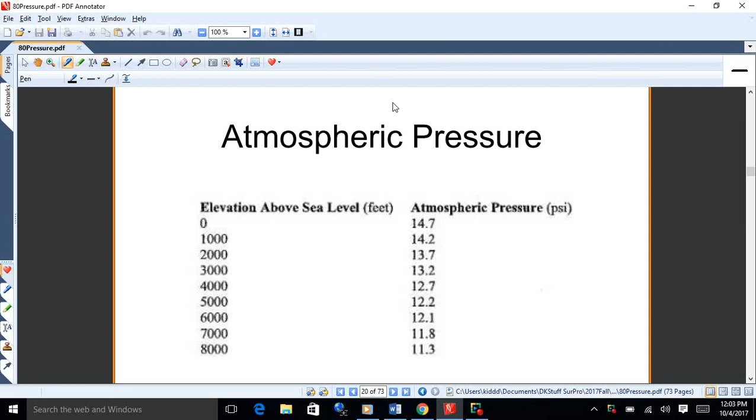So we doing okay with this stuff? So we have just that direct relationship between height and pressure. Don't make it any more complicated than that.

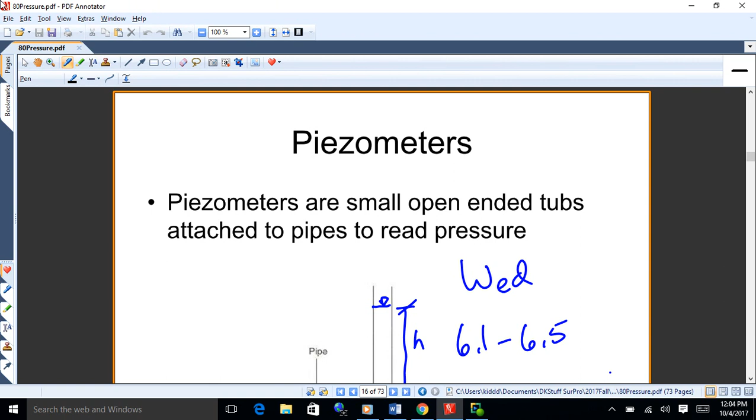Okay, so 1 foot is 0.433 psi. And then you can use that relationship to measure pressure in pipes using what they call a piezometer. I remember back when I was in school, they were doing some hydraulic testing, and they had these things filled with red oil, is what I remember, so they could read them.

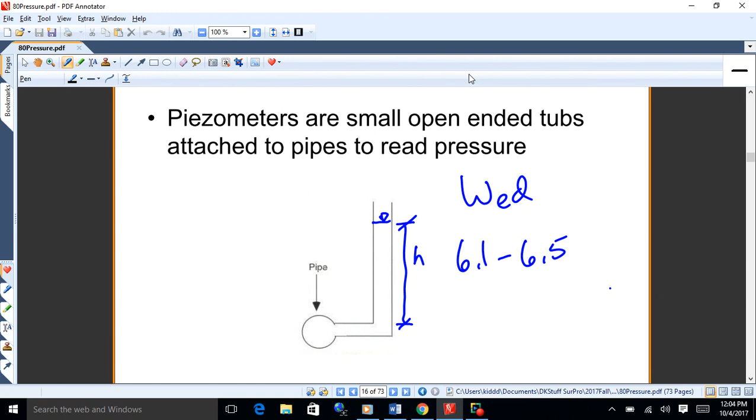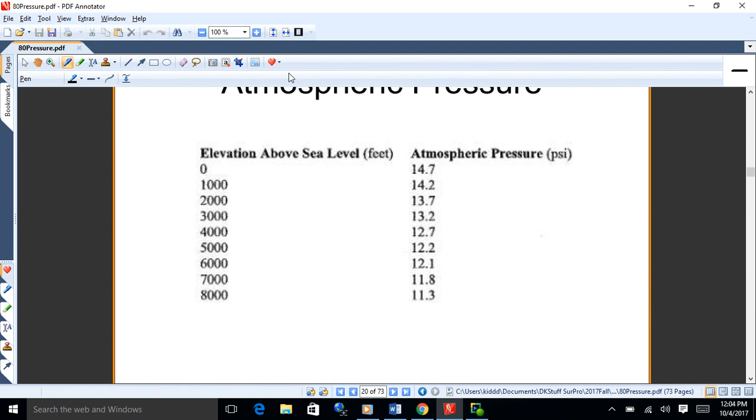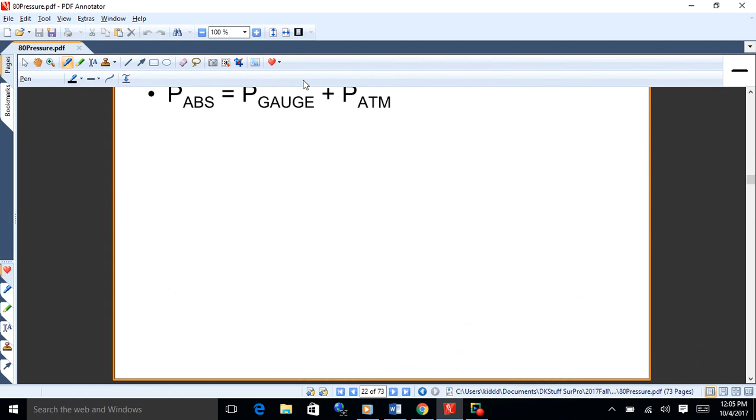All right, and then we started to look at atmospheric pressure a bit. And what we figured out here is that if you put a closed tube of water and turn it upside down into a vat of water or a tank of water, what's going to happen is the water in that tube will rise 34 feet, okay?

So we figured that out, and that has to do, if the tube were a square inch in area, that atmospheric pressure is 14.7 psi. You'll get a vacuum at the top of the tube, so there's no push back at the top. So the atmospheric pressure pushes on the water, and all those water molecules push on each other, so you end up with a push going up the tube that holds up 14.7 pounds of water. And if you work that out for a 1 inch square tube, that comes out to be 34 feet.

Okay. So we okay with that?

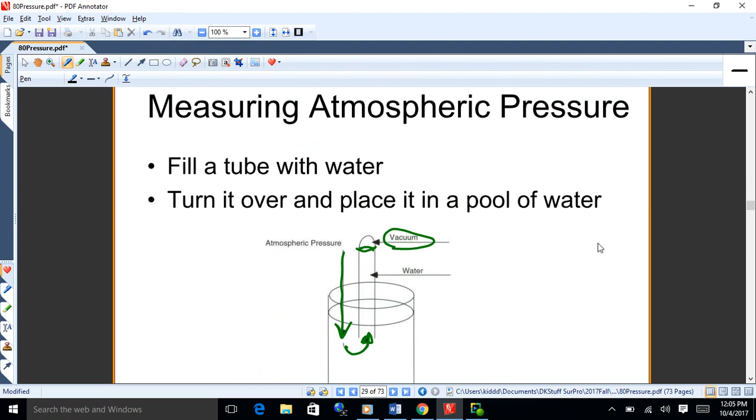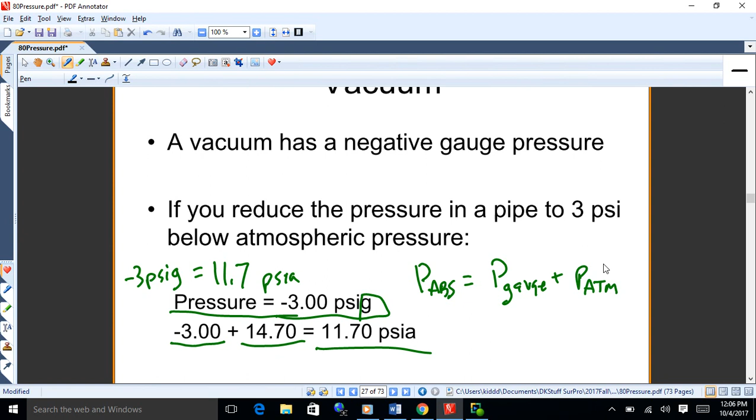All right, and then we also looked at absolute pressure and gauge pressure. Gauge pressure is the everyday average pressure that we deal with. Absolute takes the gauge and adds atmospheric to it. Okay, so those are some of the things that we worked out.

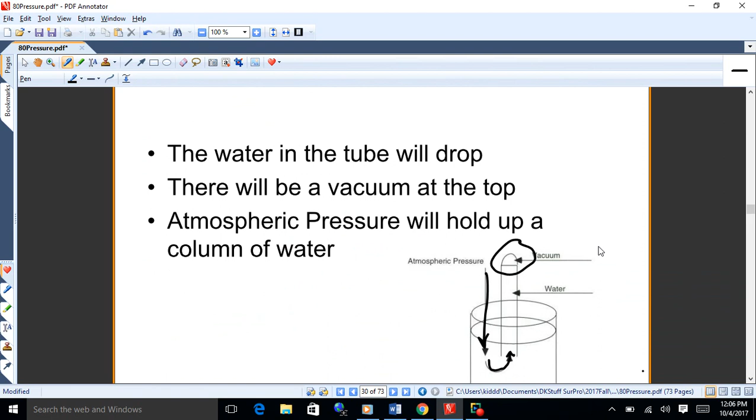All right, so what we've got now is a few ways of looking at things. Atmospheric pressure is 34 feet of water. It's also 14.7 psi, A for absolute.

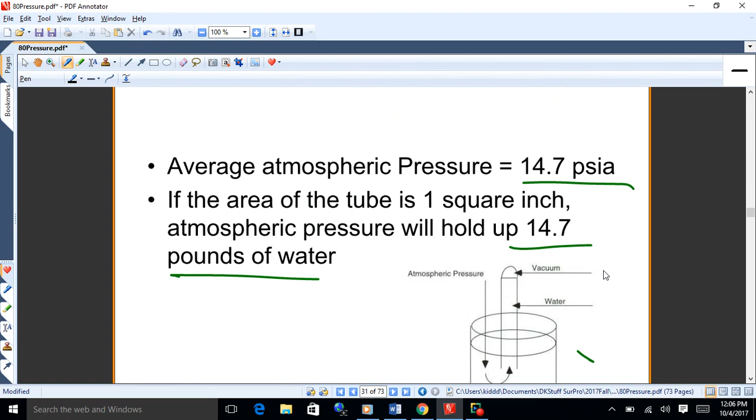Now, in reality, there wouldn't be a perfect vacuum at the top of that tube. There'd be a little bit of vapor pressure. We'll get into this more when we look at pumping, so we won't discuss it too much more, but in truth, some of those water molecules in the tube would evaporate, and they'd start creating a little bit of pressure that would push that column down a little bit. Not too much, but a little bit. But we'll get into that later. Okay.

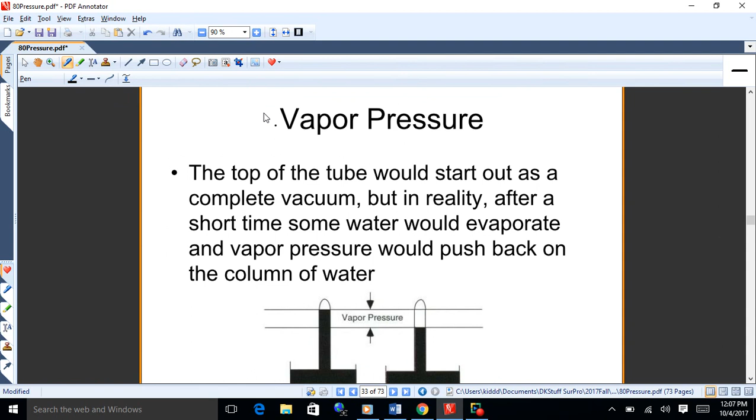All right, now what we've got here is a few relationships. So what we've got is that 14.7 psi is equal to 34 feet of water. Okay, they're equal. They express the same thing, the same pressure.

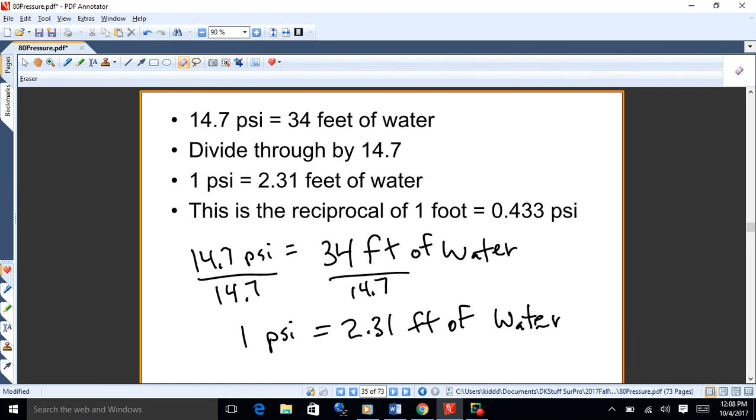Now what you can do is divide both sides by 14.7, if you like. And what you'll get is 1 psi equals 2.31 feet of water. This is on your formula sheet also, I think, and that's another relationship you can use to do conversions with. So we've gone both ways with that.

We also have that 0.433 psi is equal to 1 foot of water. We can go either way with it. Those are just reciprocals of each other, going in different directions. Okay, so those are equivalent things.

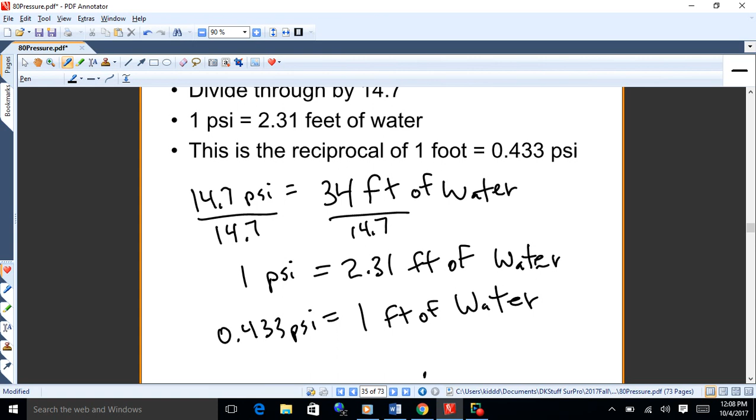And I think you've got both conversions on your formula sheet, if I remember right. We do. You do? Okay, great. So that's there for you if you need it.

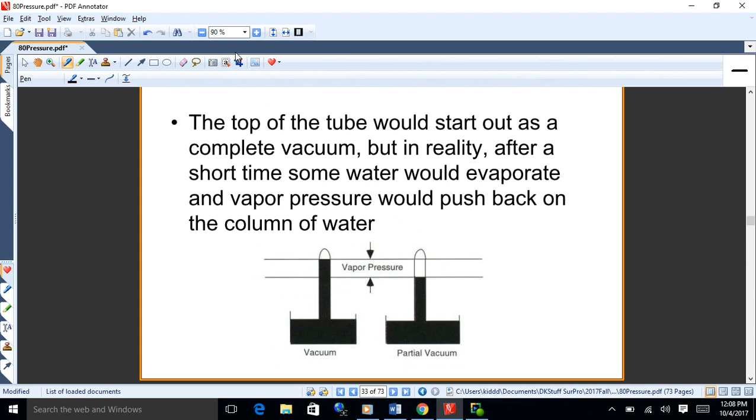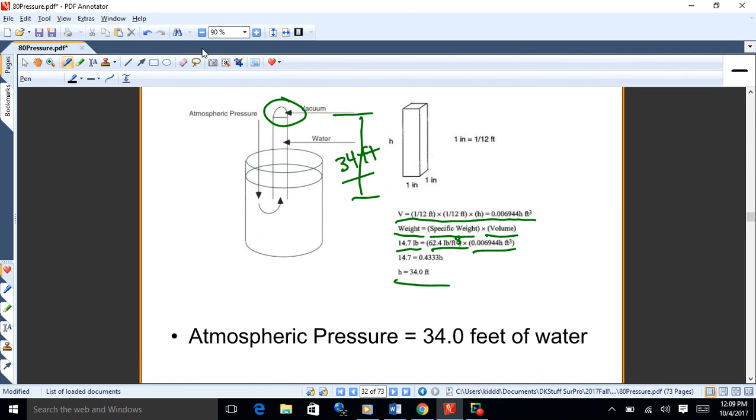All right, now getting back to this idea of a barometer, you could make a barometer out of water and the thing would be 34 feet high. They actually used to have barometers filled with fluid and they measured the height of them to determine atmospheric pressure. But a 34-foot high barometer is obviously pretty impractical.

So what was commonly used was mercury. Mercury is a heck of a lot heavier than water. It's 13.6 times as heavy as water is. So if you take that 34-foot water barometer and divide it by 13.6, you get 2.5 feet, which is 30 inches. So atmospheric pressure can also be described in inches of mercury.

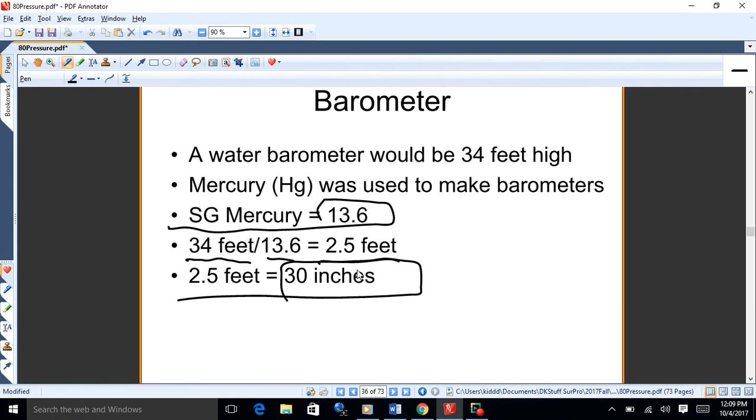Average atmospheric pressure at sea level is 30 inches of mercury. They actually used to use gauges like this and measure them. And if you ever listen to the weather report, they'll report the barometric pressure, they call it. That's from a barometer, and they'll tell you how many inches of mercury it is. That's the common way they use to report weather. Okay.

That's where that number 30.29 comes from. As it goes down, they watch the barometer go up or down depending on what sort of weather system's moving in. If the barometer drops, you probably got some storms coming in, and the lower it goes, the more likely you are to have storms. High pressure systems are more clear and sunny and bright. That number really comes from an actual barometer. Now those things are obsolete, but they still use the term.

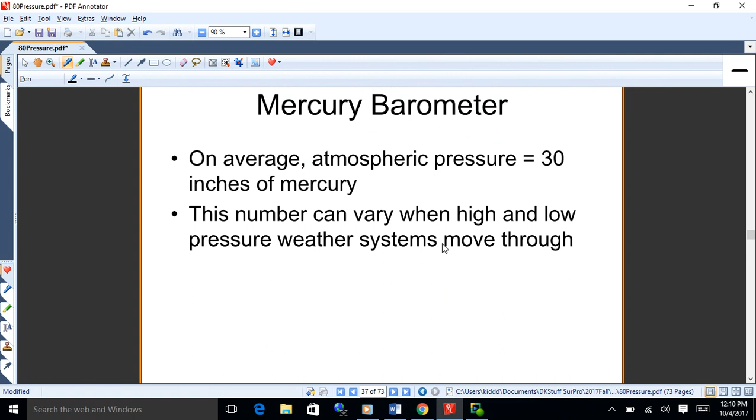It gets a little complicated because there's 3 ways to measure atmospheric pressure. Average atmospheric pressure is 14.7 psia, 34 feet of water, and 30 inches of mercury. You could use any of these, and they're all used in different situations. You've got that on the formula sheet, in the left-hand side in the middle, and I've got a chart there that helps keep these things straight.

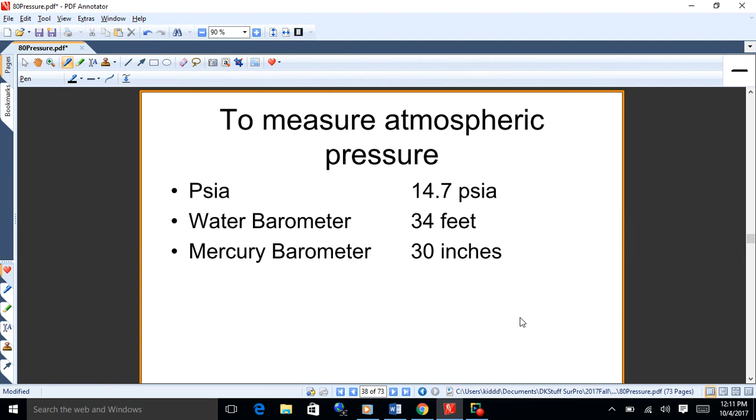Often what we use all this for in our line of work is measuring a vacuum. A vacuum is a pressure less than atmospheric. If you measure from absolute pressure equals 0, like a perfect vacuum in outer space, you can measure a vacuum in psia absolute pressure, a water barometer, or a mercury barometer. Those are 3 different ways you can measure a vacuum, assuming the perfect vacuum - absolutely no pressure at all - is 0, and you're measuring up from there.

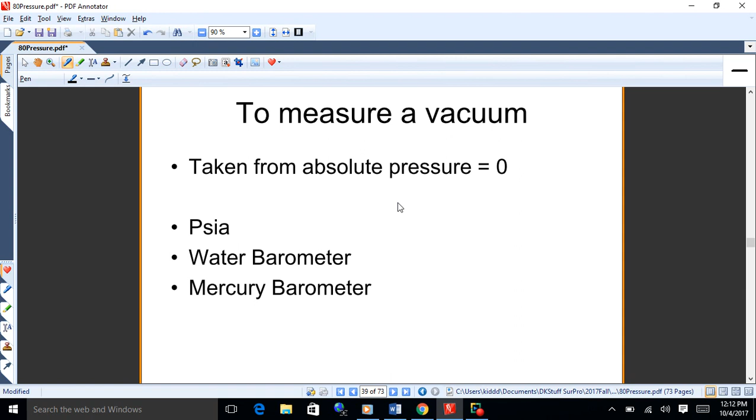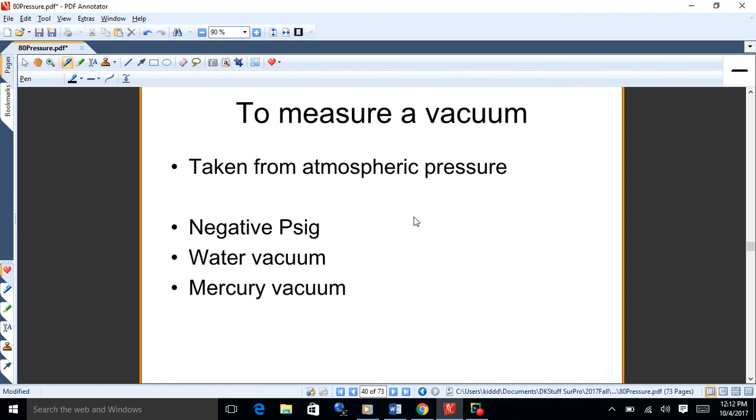You can also measure a vacuum from atmospheric pressure, calling that 0. If you're doing that, you would measure the vacuum in negative psig gauge pressure, a water vacuum, or a mercury vacuum. So you can measure a vacuum, as it turns out, in 6 ways. There's 2 different 0 points: either 0 is a perfect vacuum, or 0 is atmospheric pressure.

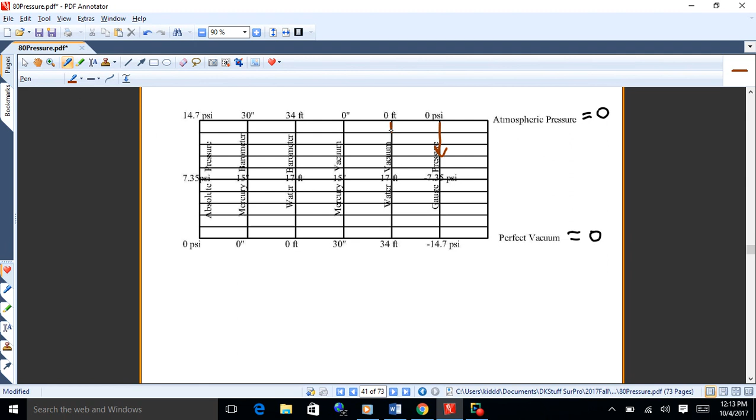So you've got 2 different 0 points. For gauge pressure, 0 is atmospheric pressure, and what you do to measure a vacuum is measure down. So if you have gauge pressure, you'd measure down like that. If you have a water vacuum, you'd measure like that. And if you have a mercury vacuum, you'd measure like that - they're all measured down. The word vacuum on a measurement means it's a negative number.

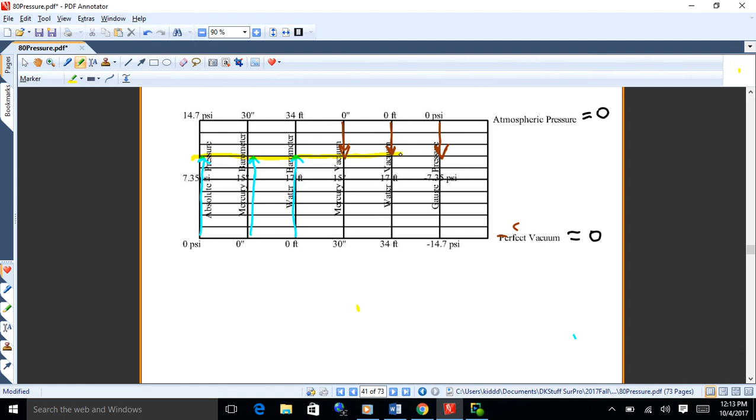Measuring down. Now the other way to measure a vacuum is to start at a perfect vacuum, being 0. In that case, your measurements go up. You always count your measurements from 0 to whatever it is you're going to - that's how I think about that chart. So if the measurement is right there on the yellow highlighted line, you'd measure it as shown. It's always from 0 to the measurement.

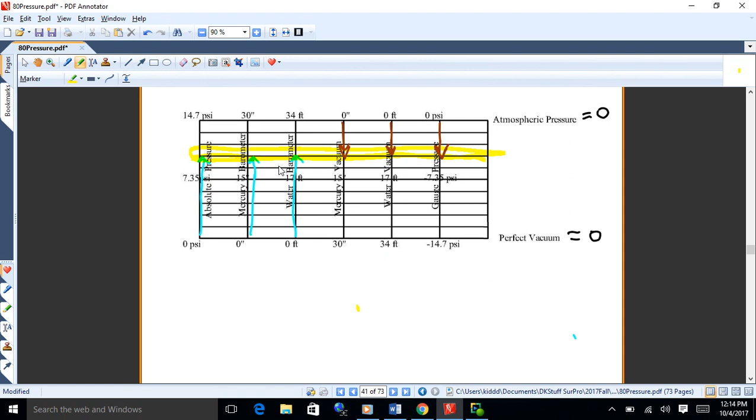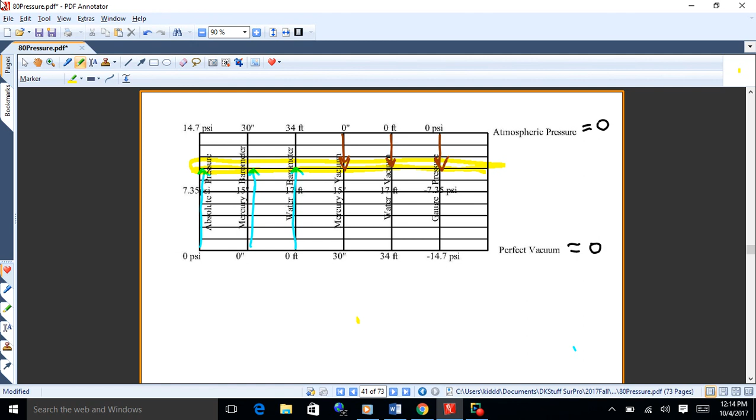There's three ways to measure: water, mercury, and psi. You can either measure them down from atmospheric or up from a perfect vacuum, either way. We just want to be able to convert these from one unit to the other, depending on what we've got, because we seem to use all of these in different situations. But the one thing to remember is you always start at 0 and measure to the line - either up in the case of absolute vacuum being 0, or down in the case of atmospheric pressure being 0. So you start at 0 and measure to your line. This is one way to do these conversions - to me it makes it kind of handy.

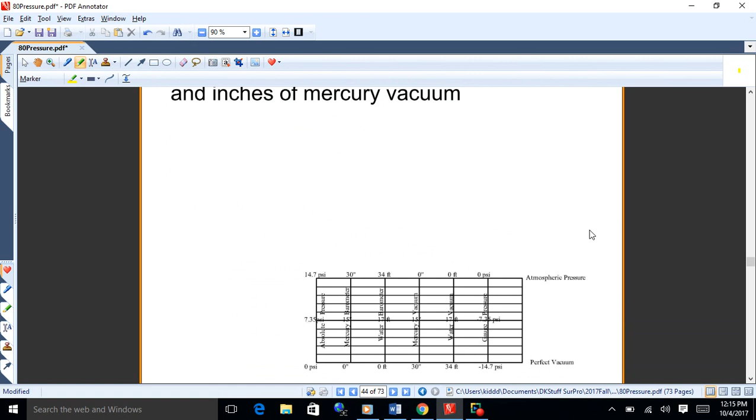Let's do an example here. Let's say we got 24 feet of water barometer, and we want to convert that to psia and inches of mercury vacuum. So what I would do is go to this little chart and find where 24 feet of water barometer is at.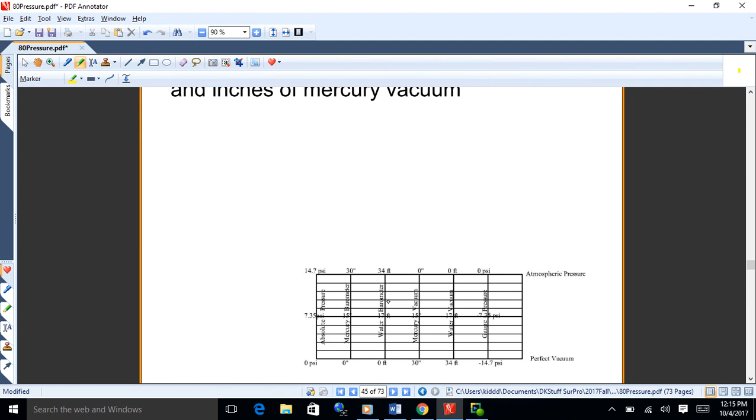Where that's at is on the water barometer column there, the third one over from the left. Halfway for that is 17, so my thinking is 24 ought to be about there. So here's where 24 feet of water barometer is on that chart - that's its location.

Now I'm going to have to convert to a lot of different units. So what I do - and there's many ways to do this, this is just a systematic way - is figure out what percentage of the way on that scale you are. What's the percentage of the total that you've got? So I'm going to take 24 feet of water, is what I'm going to do.

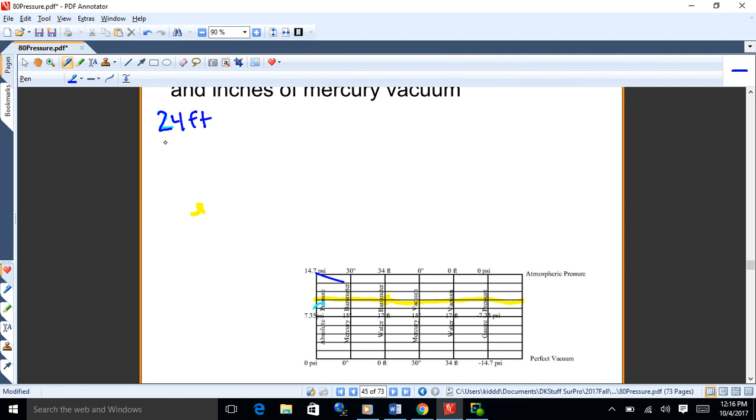And I know the total is 34. So if I divide those out, I've got 70.6, or 0.706 as a decimal. So the idea here is underneath the yellow line, I've got 70.6%, and above it, I've got the remaining percent, which would be 29.4%.

So I'm 70.6% of the way up the scale, that's the idea. How do you know it's 34? 34 is the total. And you know, the total varies depending on which unit system you're in.

So you all okay with that? Okay.

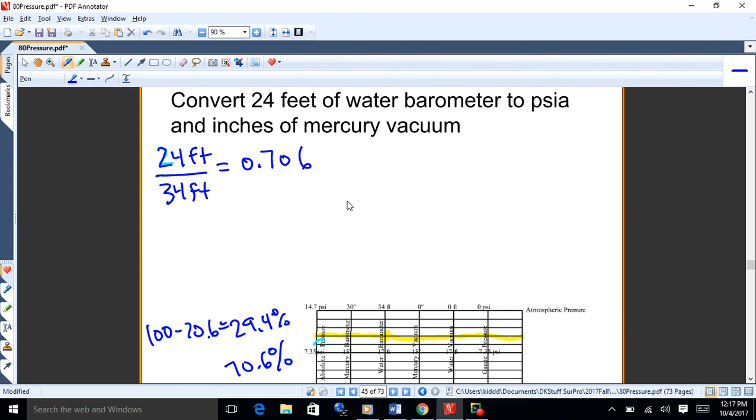So what I want to know now is what other units do I want to convert into? What I want to convert into is psia, and inches of mercury vacuum. All right, so psia, let's see where that is, okay?

So with the water barometer, I came up like that from the bottom, because you always start at 0 and measure to what you want to find.

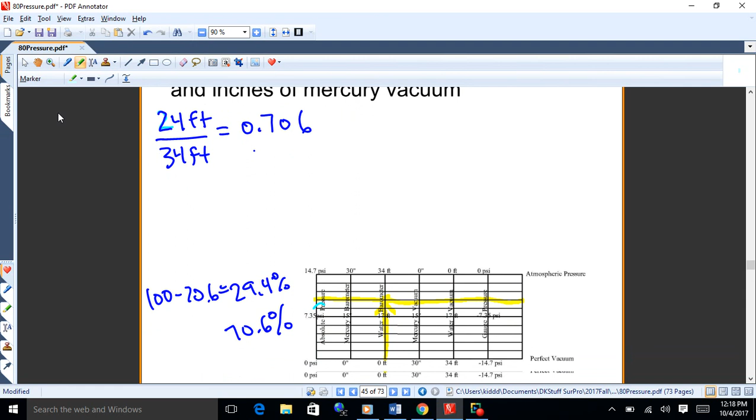Okay, psia, where are they at? They're right here. So I want to measure from the bottom up for psia, like so.

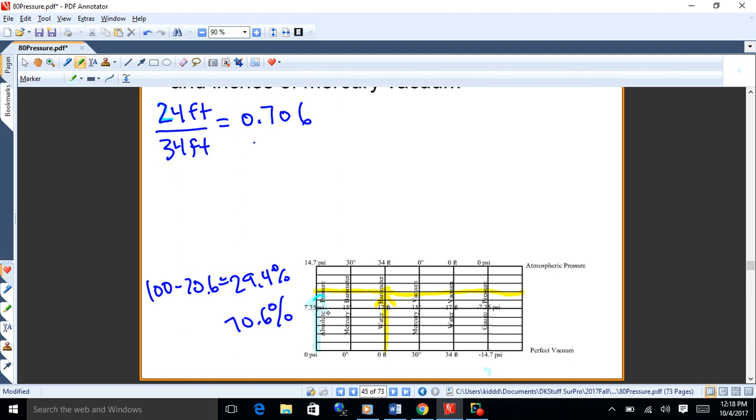And then inches of mercury vacuum, what I want to do is find that, okay? So inches of mercury vacuum are right here, and from there I'm going to start at the top and measure down, okay?

So you always start at 0 and measure to your line. That's the general rule on this stuff.

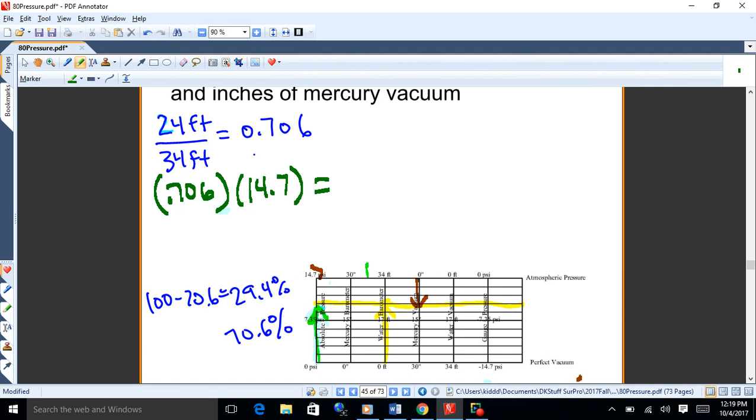So for the psia here, what I'm going to do is say, okay, I've got 70.6% of the way to go, so that's 0.706. And the total is 14.7. So if I take 70.6% of 14.7, I get 10.4. So that's the psia I've got.

And then if I want to find the inches of mercury vacuum, what I've got on the top of the line where the red arrow is, right here, is 29.4%, so that's 0.294. And mercury vacuum is 30 inches. So when I multiply that out, what I get is 8.82 inches. Hg is the chemical symbol for mercury.

So by using this chart, I can figure out which side of the horizontal line I am for my particular measurement. I can find the percentage on either side, and apply that to the total scale I'm dealing with. Always start at 0 and measure to the line. Everybody okay with that? All right.

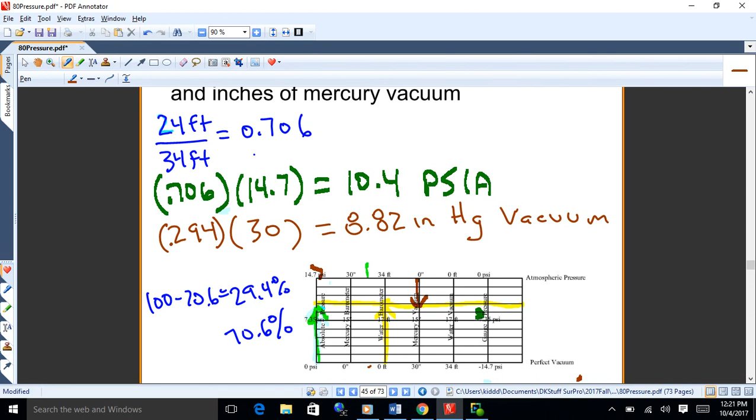Now there's other ways to do this if you like. This is just a graphical way that you can see it. I put the chart there on your formula sheet, so you can use that on homework or exams or whatever, okay? It's right there. There's other ways to do it though, if you prefer. Whatever works for you is fine.

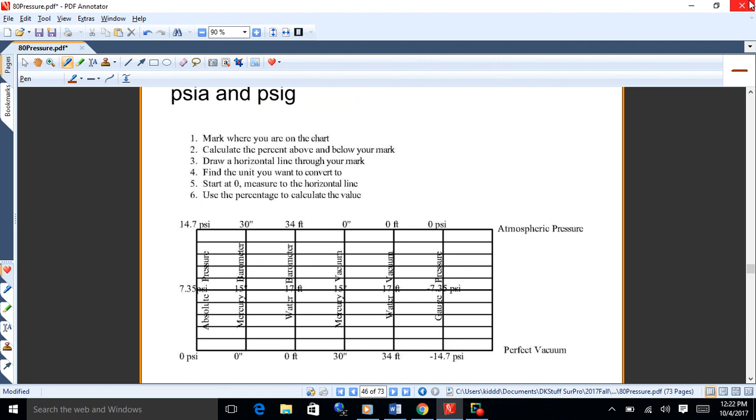All right, you two can do this, so why don't we have a look at the next one there.

Convert 20 inches of mercury vacuum to psia and psig. So why don't you work through that?

I don't know if it is exactly right there. I'm just drawing the line about the spot. Here's 15, here's 30, so I know somewhere. It doesn't matter that I put it in the spot. But it's going to matter for this. Well, it matters that that's really what I want, those numbers.

So if I just draw the line anywhere here between 15 and 30, because I'm going to do the calculations to calculate, it doesn't have to be drawn exactly. And this is the choice. So mercury, just pay attention to what side the zeros are on.

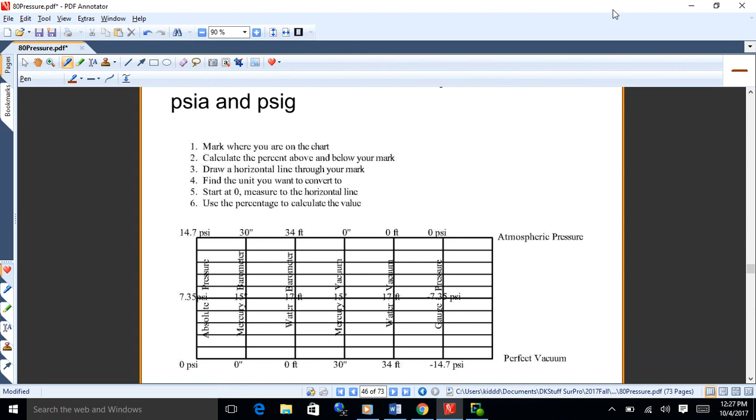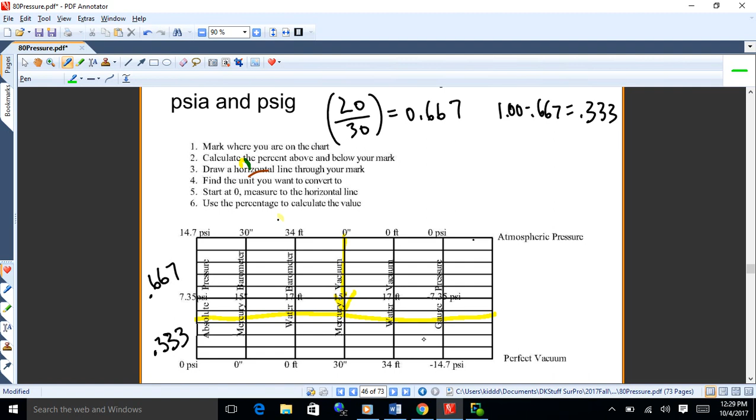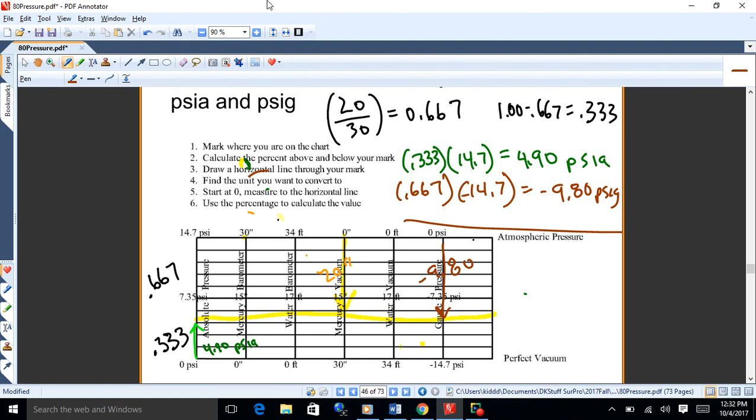Okay. Good with that? Okay. Okay.

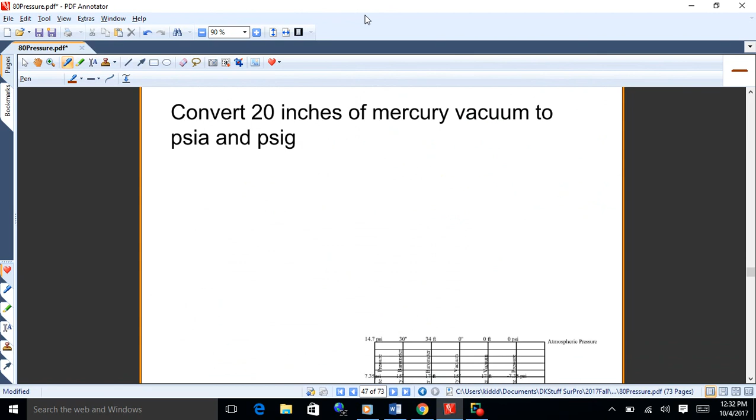So that's another type of pressure problem there, okay?

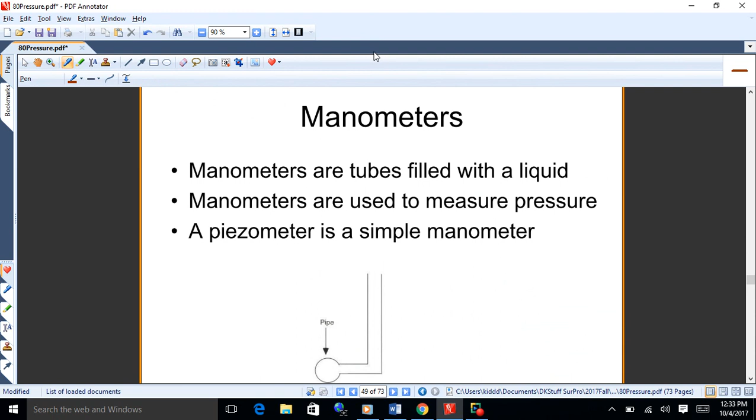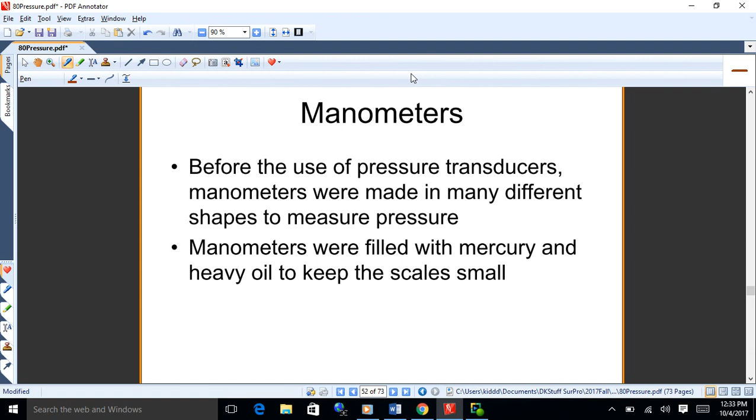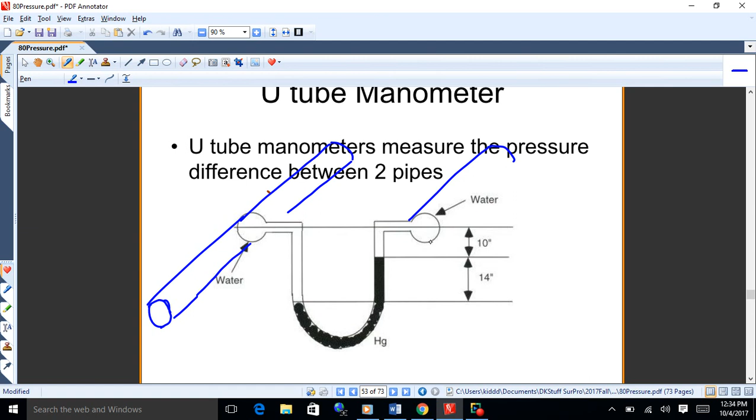So the pipes are coming in and out of the page kind of like that. Okay. And then the manometer tells the pressure difference between the two pipes.

That's the idea. And the side of the pipe that has the lower water level has more pressure? Yeah, because it's pushing the heavy fluid towards the other pipe. That's the idea. Okay. Any y'all working in plants still using these anywhere?

Anybody seen one of these? Yeah, okay. They're old technology. I mean, you know, the new stuff's all digital. You know, okay.

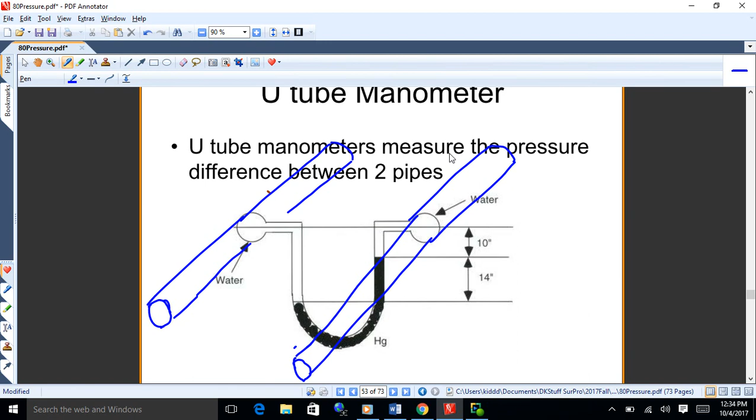So what you can do, you can use this to tell the pressure difference between two pipes. Now, what you do is you look at how much mercury is being held up, but you also want to look at how much water is being held up too. So you want to look at both of those things, and that's how you determine the pressure difference.

So here's how I would approach this thing. Now, in your book, you've got 36 and 24, a little bit different than the sketch I've got, right? So you've got 36, or 24 on the left for this one. And 36 is the total, right? Okay.

All right, so the way I look at these is I go, okay, what's different about what the two pipes are doing? So what's happening here is the pipe on the left is pushing water towards the pipe on the right. Okay? Or pushing the mercury, I should say. All right, so if I look here and look there, the difference is between the two red lines. Above the top red line and below the bottom one, everything's the same. So the difference is here.

So those are A and E, are the names of the pipe. So to keep this simple, what I would do here, I would just look at what A is doing towards E. And what A is doing towards E is it's holding up 24 inches of mercury.

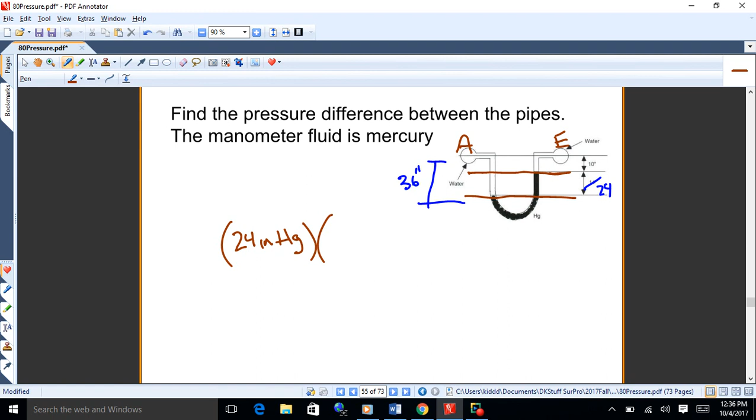And then what would we do with that? We would go, and I guess the first thing we better do here is get this into feet, okay? Hg is the chemical symbol for mercury. That's why I'm labeling that Hg. All right. So I'm going to go 2 feet of mercury.

And then I know that 0.433 psi per foot is my conversion for water. And I know that mercury is 13.6 times as heavy as water. There's other ways you could do that conversion, but that's how I'm doing it, because I know that mercury has a specific gravity of 13.6.

So what that's going to give me is the psi of mercury that would push up, if it were pushed up 2 feet, that would be the equivalent of 11.78 psi.

Now I do have to account for the other side though, because there's 2 feet of water being held up by E towards A, and I have to account for that. See, A doesn't push that 2 feet of water towards B, it pushes the mercury.

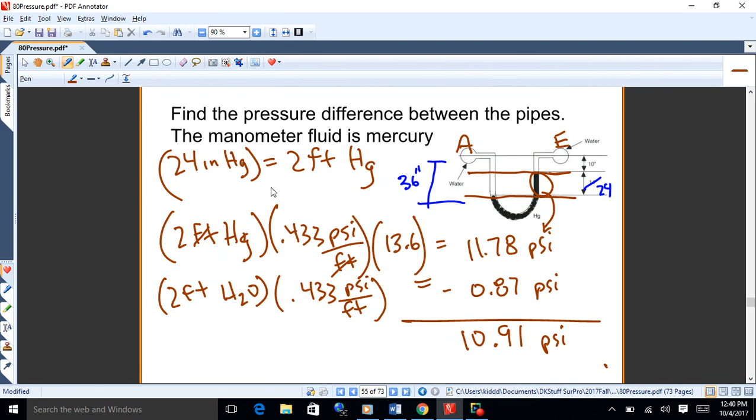So we good with that? Any questions? Okay.

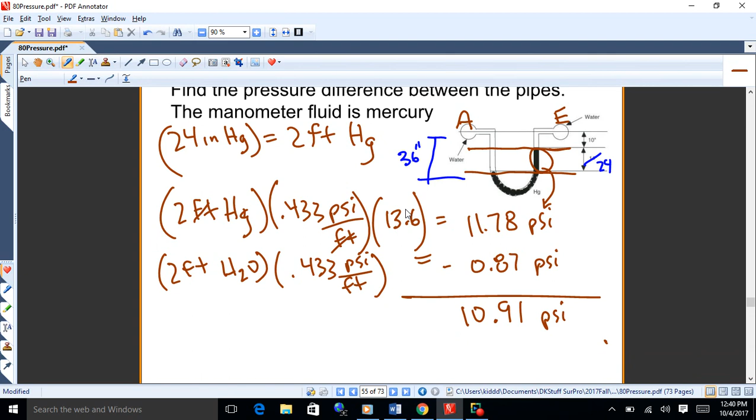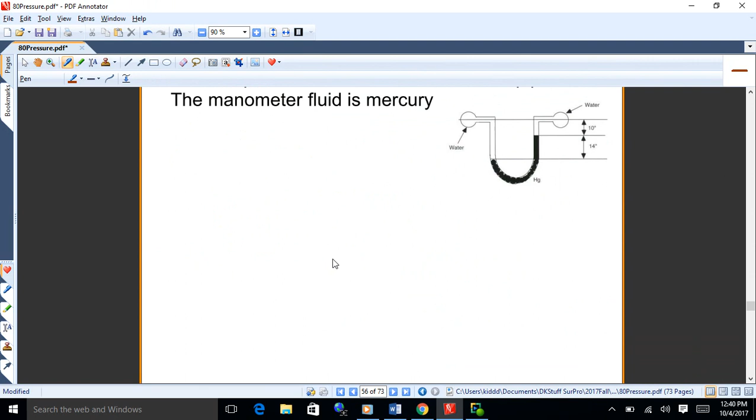All right, so those are the old ways of measuring pressure. There's also something called a Bourdon gauge. And what a Bourdon gauge has is a dial face on it with a range of pressures. It then has a tube made out of some sort of metal that'll flex a little bit.

Copper or brass are fairly common. So if you pressurize this little arc of metal, it'll try and straighten out. Then you run some linkages in there and turn the dial with that. So this tries to straighten out, and the linkages then turn the dial. That's the idea.

All right, so this is an analog gauge, it's not digital. So that's another way to measure pressure. Now, if you're going to use this gauge, what pressures would you trust it for? Or what pressures would maybe not trust it for? Whatever you want to think about it.

Does that thing measure accurately from 0 to 15 psi? Where do you want to use this thing for, though? See, these things are a little tricky. Think about the engineering that goes into doing this. You're taking the flex of a tube and converting it into a pressure. That's not exactly accurate, you're right. That's a little hard to do. I mean, it's a cheaper gauge, but you are sacrificing a bit of accuracy.

Where's the range for which it's most accurate, though? In the middle, okay? I don't know exactly what the percentages are, but I wouldn't want to be using this gauge for low readings. It's not going to be super accurate down there, nor is it going to be super accurate near 15. I'd estimate 3 to 12 or something like that. So when you're using these things, try and stay in the middle of the scale. Consider getting a different gauge if you're not. So generally you want to be using those kind of, in the middle range.

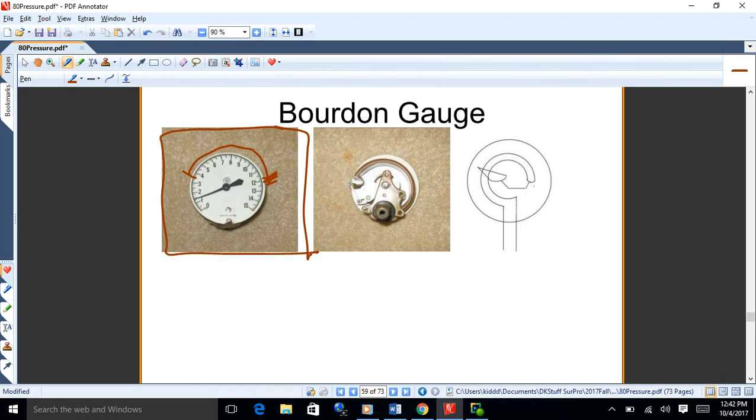All right, have you all in the water program taken that water sources class? Did you go out and look at the wells we got on campus? You can go look at them, talk about them. You talked about it, you didn't look at them. We looked at the sheet that was right when they were put in. Yeah, well log and all that. Okay, but you didn't run any testing on it or any of that.

Okay, well, do you know what a drawdown test is? Okay, so what you want to know with water wells is how deep they are. And that is something you got to be careful about, because if you put too many wells in an aquifer, you start pulling more water out than it's coming back in. The aquifer is going to start dropping and dropping and dropping, and that's trouble.

So what you're going to do, these are called bubbler gauges sometimes because they push little bubbles of air out the bottom of the gauge.

Does that make it easier for the water? No, I don't think it really makes much of a difference. It's not a whole lot of air, but they just push a little bit out, so you get a stream of bubbles coming out of it. And what they measure with that pressure gauge is the back pressure.

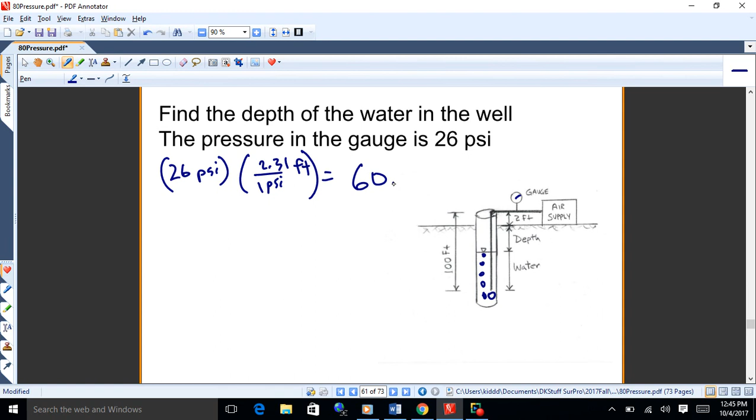So if we've got 26 psi there, how many feet of water does that represent? 1 psi gets you 2.31 feet. Yeah, 60 feet. So if that gauge reads 26 psi, that's how much water is above the tube.

Now what you got there, you put 100 feet of tube into the well. You know what's called the casing of the well. That pipe is 2 feet above the ground. So you want to subtract that off, so that tube sticks 98 feet into the ground.

And you know that there's 60.1 feet of water above that tube. So what's the depth of the well here? Depth of the well being this. Yeah, 37.9 feet.

Okay. Are we assuming here that that tube has gone all the way to the bottom of the well when they're doing that? No, it just goes down. They're confident that the water won't ever go below the tube. So it doesn't have to go to the bottom because we're measuring everything from the top.

All the measurements are down. Measuring there is how much water is in the well down to the 100 foot level. You're not measuring the actual depth of the well. The depth though is measured from here down as opposed to from the bottom up. So you want to know, because as that drops, that means you're using more water. So the reference point is up top.